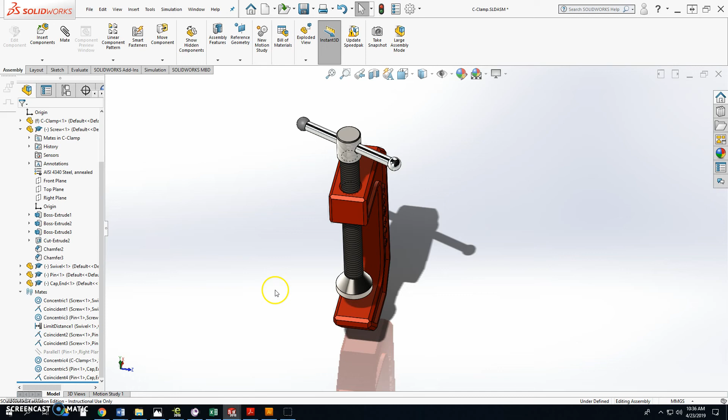Okay, once you've got your parts all fully assembled, then it's time to create what's called an exploded view. So from your assembly tab up here, you're going to go to exploded view.

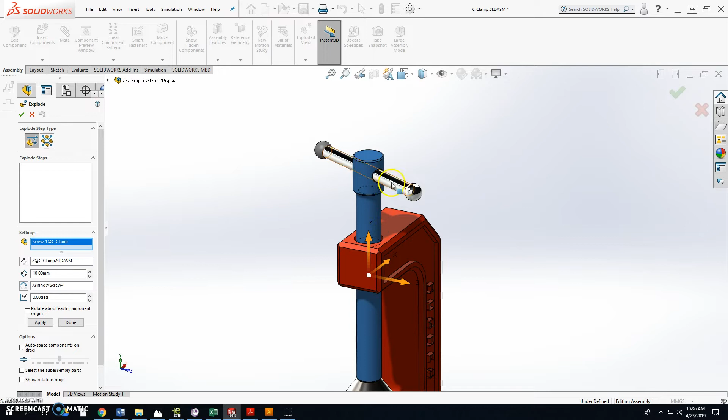The first thing you're going to do is pull some of the parts away. So I'm going to select this part, select this part, and select this part to pull those all off, pulling them straight up using this Y. I'll come up here a little bit more, right about there. Then that records that as a step.

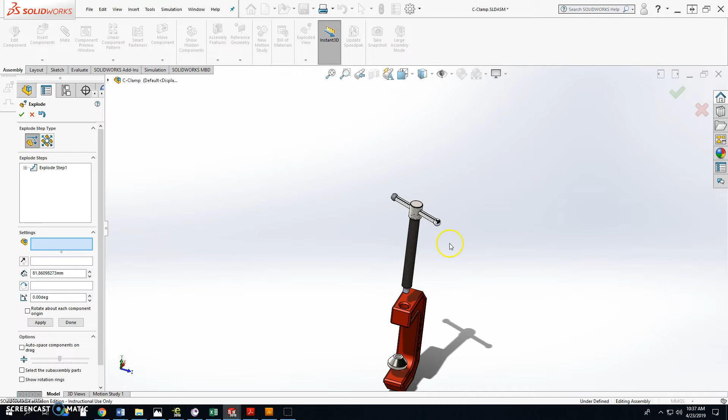So I just clicked outside of that. The next step is I'm going to pull these two apart, so I'm going to click on this guy.

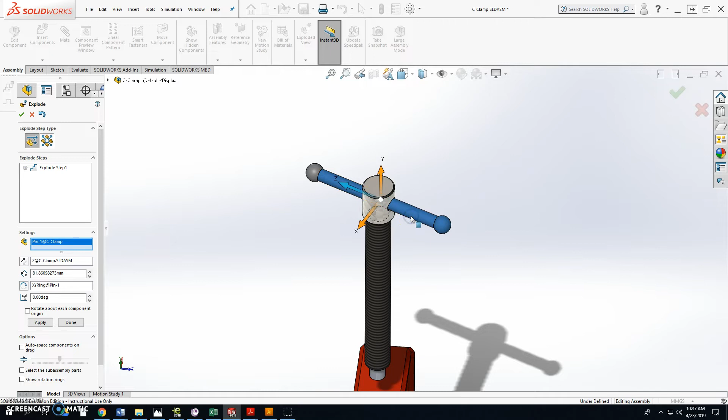Now you notice that none of the axes are aligned with the part. The direction I want to pull it out is this one right here, so I'm going to right click on that and align with selection. Then I want to click on this body or this boss right here so that Z gets aligned with it. Then I'm going to pull this off in that direction.

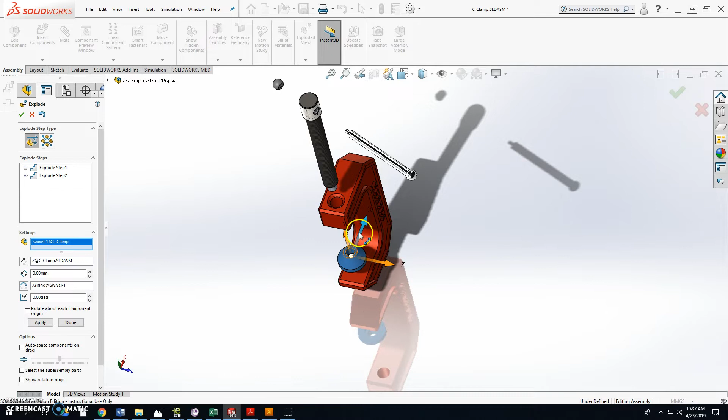Now the other thing is you notice that I had this guy pulling out a little bit front. You can either leave it here or you can pull it out. So I'll click on this one, and let's just say I'm going to pull it out front here a little bit. So there I have my three steps.

Now once you finish out with it, all the parts are separated, so how do you bring them back together? They're contained inside of a configuration. So right here's your feature manager design tree.

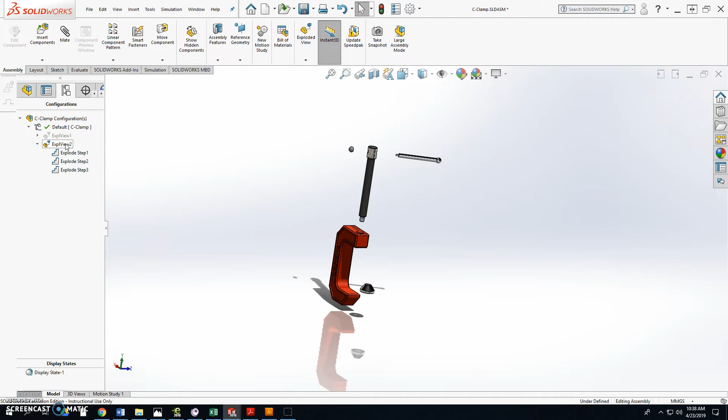You go over to configuration manager, you open up the default, and here's your exploded view. You can right click on it and animate it, so basically they'll bring the parts back together and view through that. So I'm going to exit out of that, or just click on it, and there's your exploded view, there's your collapsed view. I'm just double clicking on it.

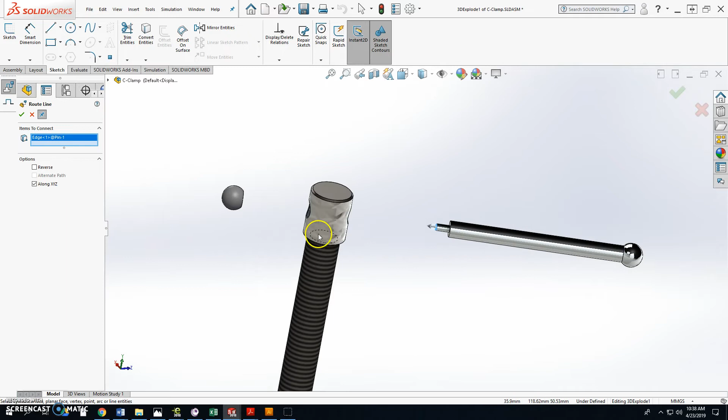Now when that's finished, you're going to come up here to explode line sketch. I'm going to add a line that's going to go from this part, and you've got to watch the arrows. So I clicked on that edge to this guy, and it should be a straight line, and I'll accept that.

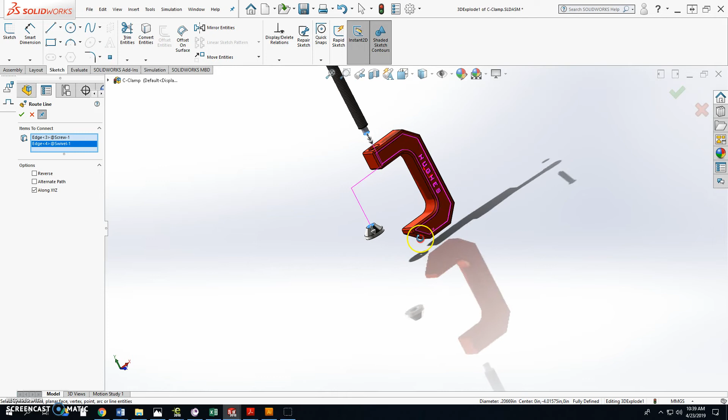Then I want to do from this edge, again watch that arrow, to that edge. Now if it is not going straight through your part, for instance I don't like where this line is, so I'm going to click on this line and drag this down. Then I'm going to accept. That looks good.

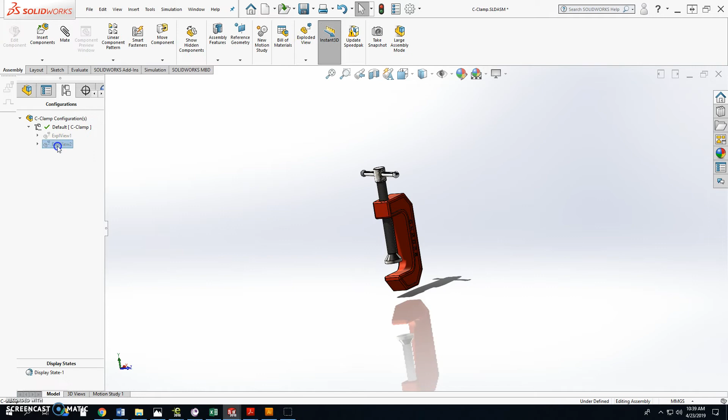So if I double click on the exploded view to collapse, the line goes away. Double click opens it up. As far as the drawing goes, let me go to the drawing.

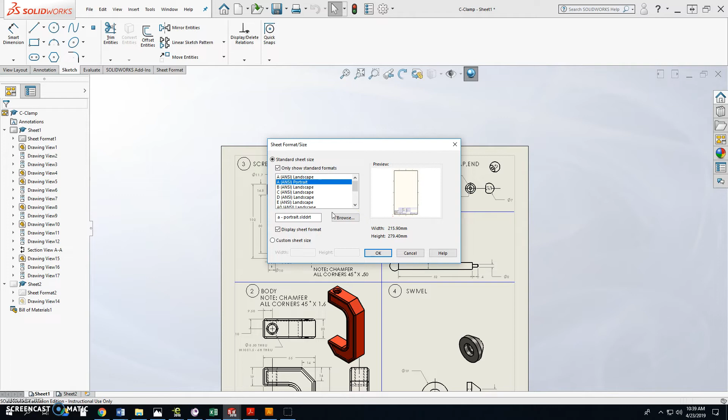Here is this drawing. You'll have your sheet 1 already made, so you can just right click and add a sheet. I don't know why it's saying that. Okay, this is just an A portrait. So then in your drag and drop, I'm going to rebuild this guy.

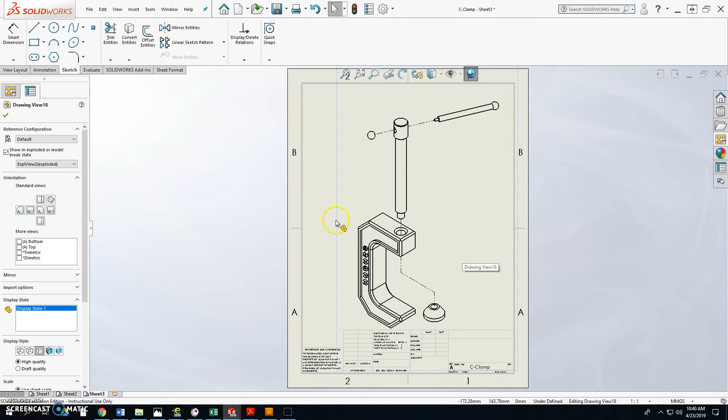It's the C-clamp assembly, and here's your isometric exploded, so you just drag that in there. Now I want to view, so over here if I click on this view, the current one I just created was exploded view 2. So right there it is. Again, click on here, go to shaded.

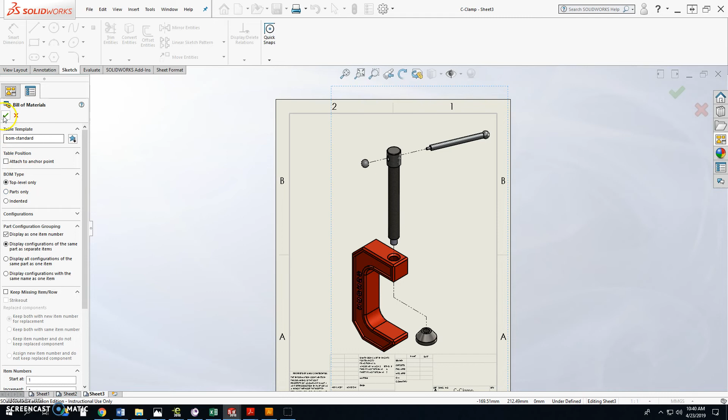Then from this point, you're going to add your bill of materials. So you go up to Insert, Tables, Bill of Materials. Select on this drawing view, top level only. Accept that. Drag and drop it up top here.

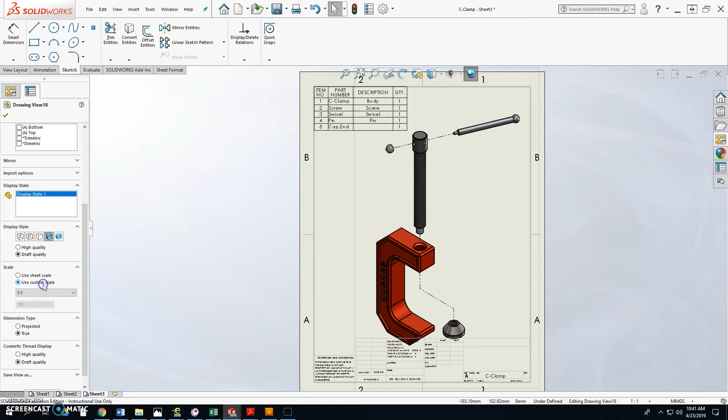So then you're just going to bring this in. I'm going to scrunch it down a little bit to make sure it fits, dock it up in the corner like this. If you have to change the size of this view, go ahead and do it. I'm going to bring it down a little bit, so I'll go down to, I don't know, that's too much.

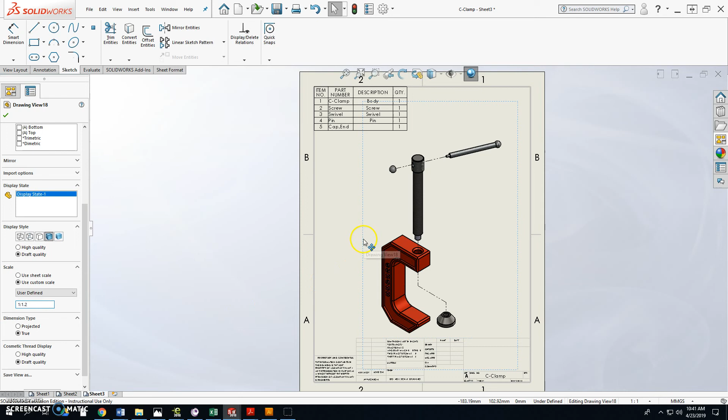So I'm going to define mine. I'm going to go up to user defined, and I'll go 1 to 1.5... let's go 1.8. Oops, sorry, 1 point, let's say 2. That looks okay. So then I'll move that where I want it.

Okay, so here's your description column. I basically don't want that, so I'm going to get rid of that. And then I want you guys to put material in there, and just override each of those cells by double-clicking in them. Break the link when it says that.

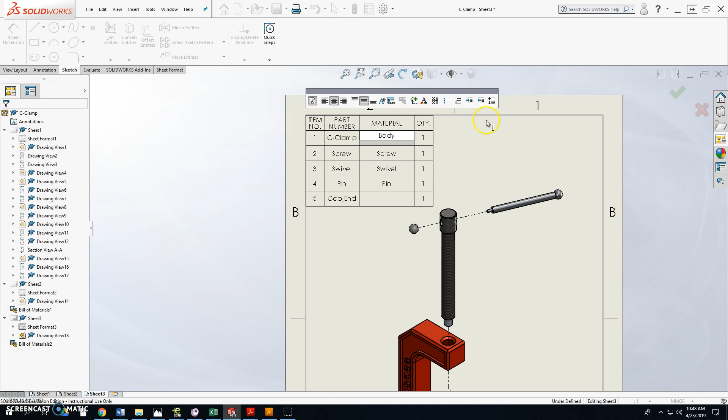So if you look at my sheet, the one I gave you, just follow those. So the C-clamp is Society of Automotive Engineers 4320, so on and so forth. Make your bill of material match mine.